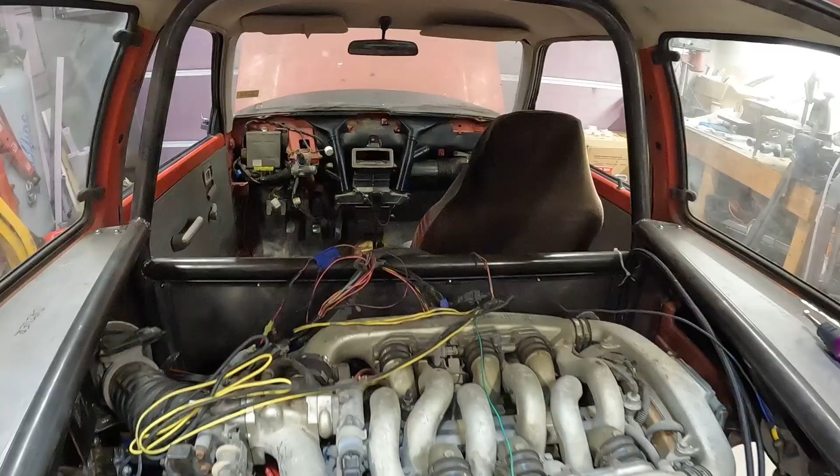Before we get into that, a few of you might have noticed the dash from the Festiva is currently not in the vehicle. Here's how everything looks right now. I've been doing a bunch for the past couple months. You may notice the shifter's sitting in there, the dash is out, there's some extra panels, and there's a new 3D printer over there. I've been making parts for this thing, so before we get into why I need to pull the transmission out, let's do a quick overview of what I've been working on.

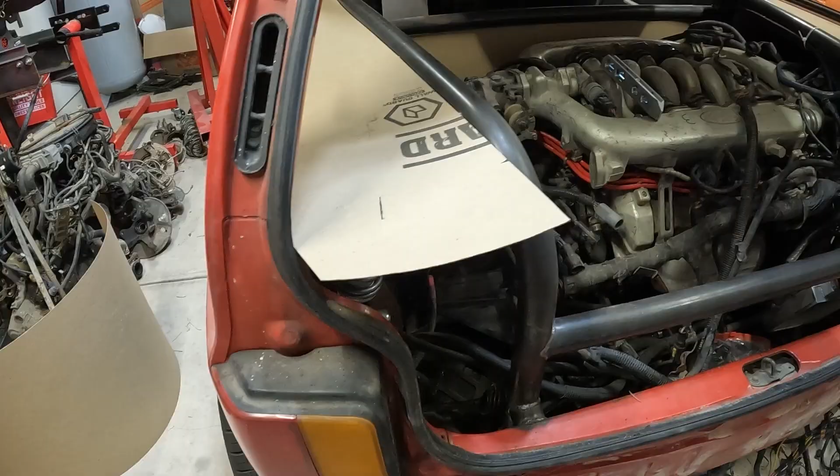I went over to Home Depot and got myself a big old roll of RAM board, which is really nice for making templates that you then use to cut out sheet metal panels. So after I made a bunch of templates, I got a bunch of sheet metal and started cutting it up and making panels for the inside of the car.

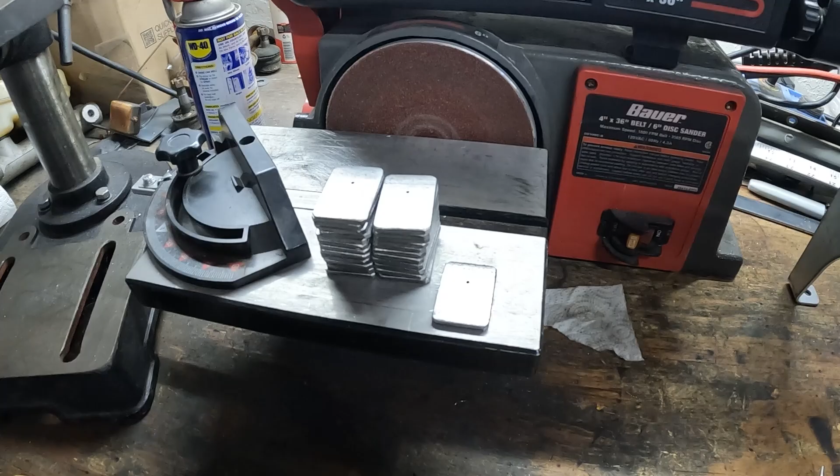Now I needed a way to attach all of those panels, so I started making a bunch of little tabs. These tabs are going to have a hole drilled in them, and then I'm going to order a riv nut gun with some riv nuts and install a bunch of those in those little brackets. That way I have brackets I can weld wherever I need to on the frame, and I can just screw in the panels, so they'll be removable in the future and not permanently welded to the car. I like that so I have access to things and don't weld myself into a corner.

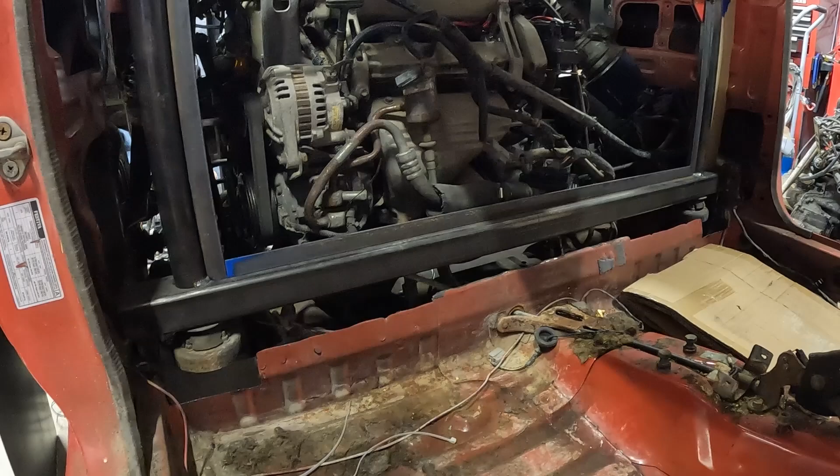With a bunch of those made, I started looking at how and where I wanted to attach things. For that big removable panel in the back, I used a bunch of angle iron made into a sort of picture frame. That seemed to work best and is going to let me make this more or less airtight once I have my panels, some insulation, and some thermal barrier put on.

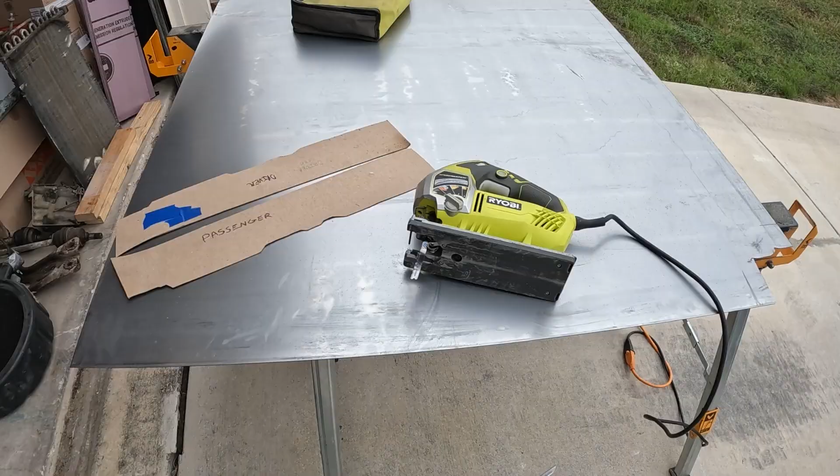All of that was going pretty well, and then I started working on the left and right side holes on either side of the roll cage. Cutting those panels out was a pain, but I think I got them pretty good. Then I worked on the left and right side above the wheels, again using some angle iron for the front, but along the sides is probably where I'll start using those tabs. This is a really nice method because you put everything on there, put your sheet metal on there, and mark it.

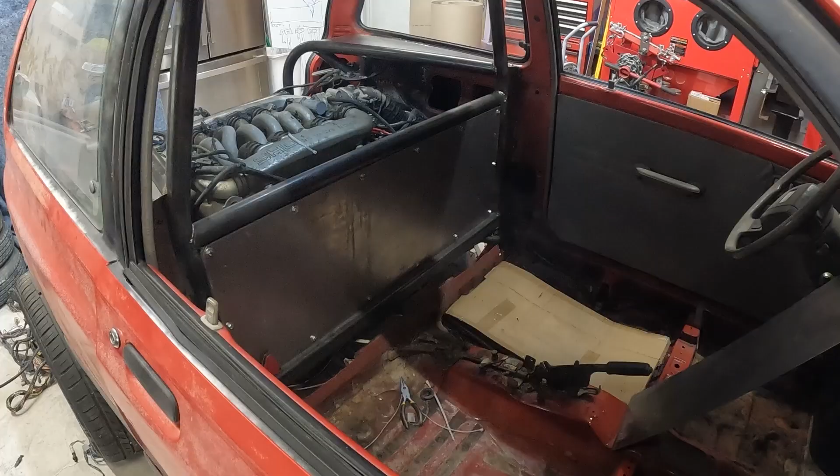Christmas came and went, and it was kind of cold, but thankfully I was able to work in the garage. I started working on that big hole at the bottom of the roll cage and made a panel for that, and got it all welded in real nice and solid.

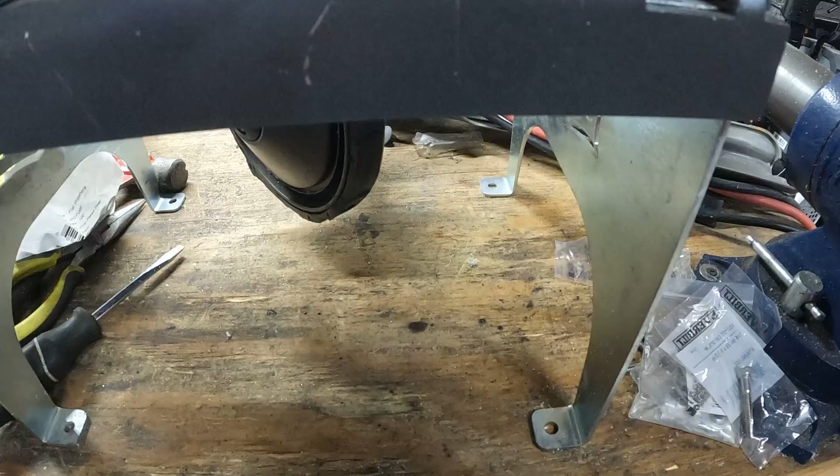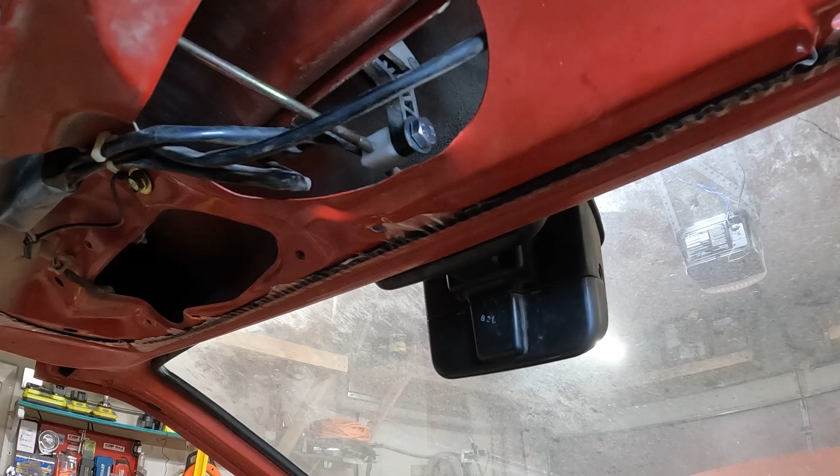I was getting frustrated that the strut in the rear wasn't staying up, so I ordered a new strut and installed it. Then I remembered that the mechanism that releases the latch for the rear hatch wasn't working, so I wanted to address that. Before, there was a small plastic clip, but it broke when I was taking everything apart. So I took some leftover Delrin and a bunch of tap and die sets from Harbor Freight and made this little block and threaded it, and now I have a way to open the rear hatch, and it stays open because of the new strut.

So the next big step was to work on shifters and shifter cables.

I used some wire and estimated the length of the shifter cables I needed, then started working on a way to attach those shifter cables to the shifter. Here's a pretty cool look at how that shifter works.

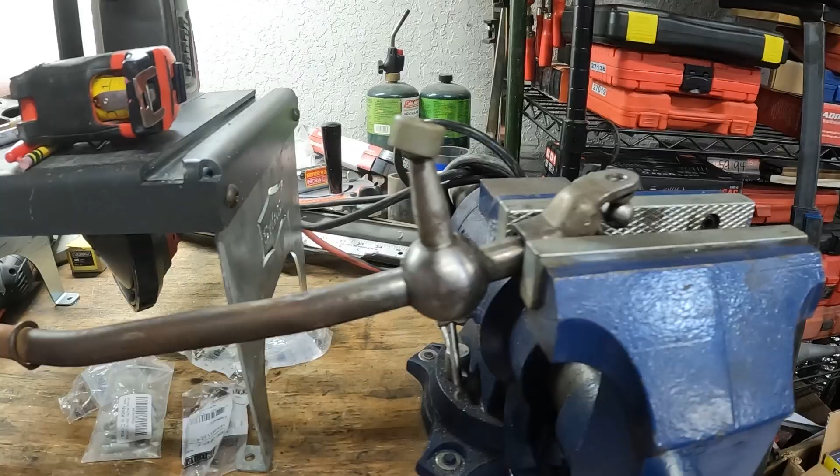When you move it left and right, it moves one cable, and when you move it forward and backwards, it moves another. So I drilled out the old ball studs that were in there and cleaned up the shifter, then worked on controlling everything with my own ball stud attachments that go on the threaded ends of the cables.

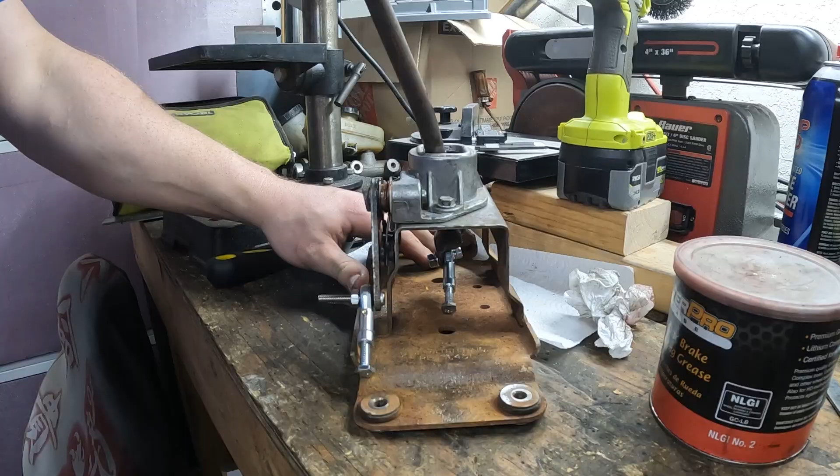Here's all of that. All the parts were removed, and here's everything greased up and ready to go back in the car, a pretty good example of how I decided to do everything for the shifter cables. It's a little tight in there, but everything's moving freely.

So there's the cables inside of the car. One of the cables came out perfect. The other one's about an inch or two too long, and the bend radius is a little tight for the cable, so I might reorder that one, but it seems like it's gonna work just fine for now.

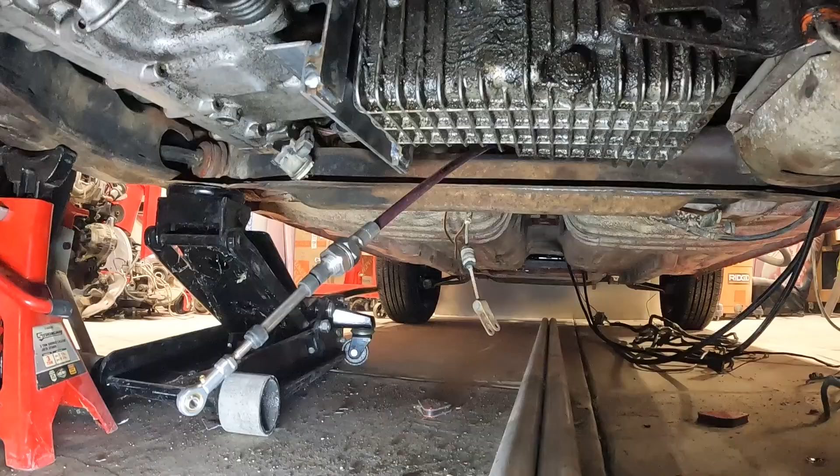I made a bracket to hold one of the cables that's gonna control one of the movements, forward and backward. Figured out exactly where I wanted to put the shifter, and again installed everything with rivnuts so that everything is removable and not permanent.

Then I had to modify this plate because the cable ends were too long and I needed to shift everything away from those ball joints. So here's the modification of that plate that I made.

Then I was able to put everything back in the car, and all of the cables you can see are now being held in place where they need to be held. So that's looking really good.

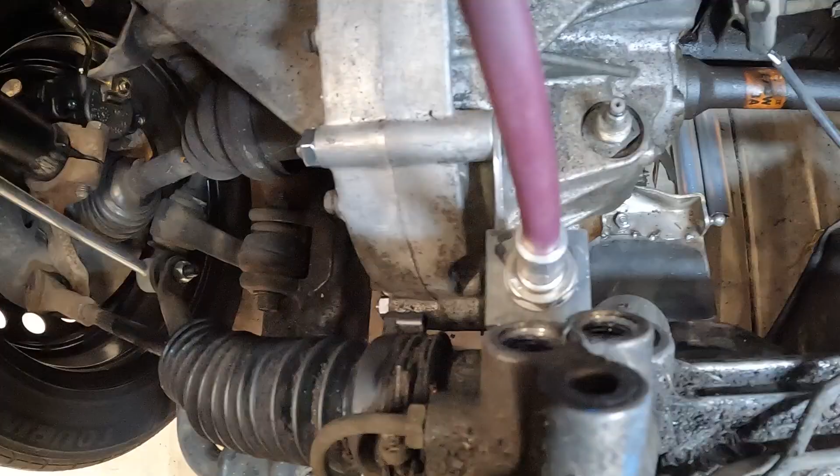Then I got to work on the cable that pulls everything up and down and rotates the bracket that I also had to modify. Essentially, you've got something that rotates it and something that pushes and pulls it.

So here is everything going from first to second to third to fourth to fifth, and then back into reverse. You can see how that linkage all works with the cables. It's pretty complicated, took me a while.

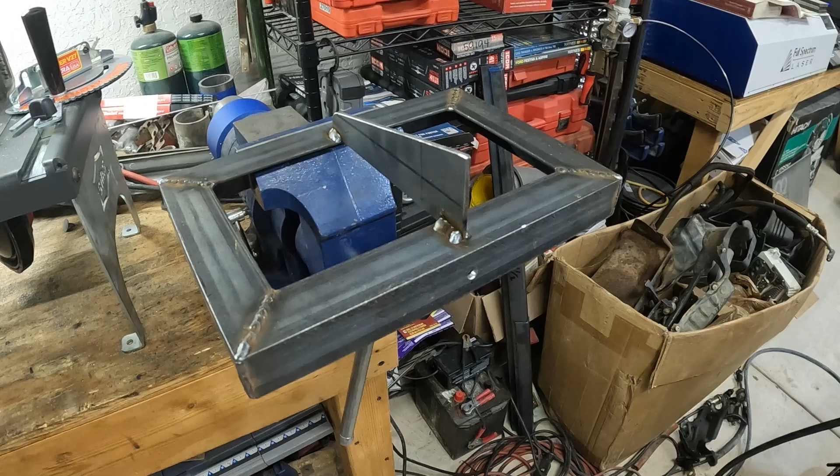Then I wanted to get the battery put in, so I made a nice little battery tray here. Here it is, turned upside down and then the right way up.

I wanted to put that somewhere in the vehicle that would have easy access. Again, my panels are removable, so changing the battery on this thing's probably gonna be a pain, having to take all the panels off to get to it, but it fits in there pretty nicely. It's out of the way, and it's in a really good spot.

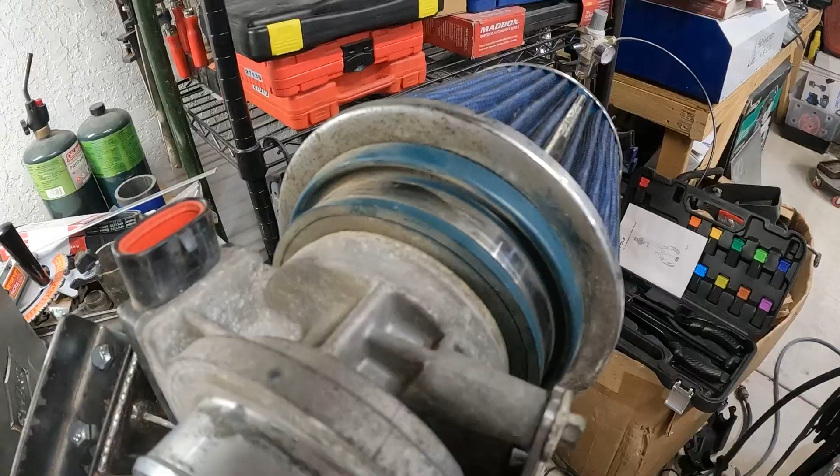After that, I needed to move on to holding the air intake hose and the starter relay, so I made a bracket for that. There's my nice little air intake with the MAF sensor.

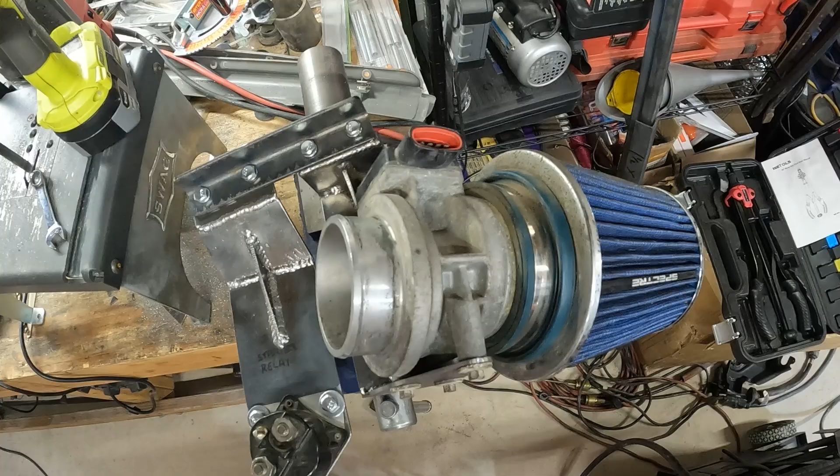So everything's hooked up, and I actually got all of the wiring done to the front of the vehicle, and I can start the car with the key now.

Then it was on to getting the clutch system figured out and the throttle cable figured out. So I started by modifying the clutch pedal. Here's the modification for that.

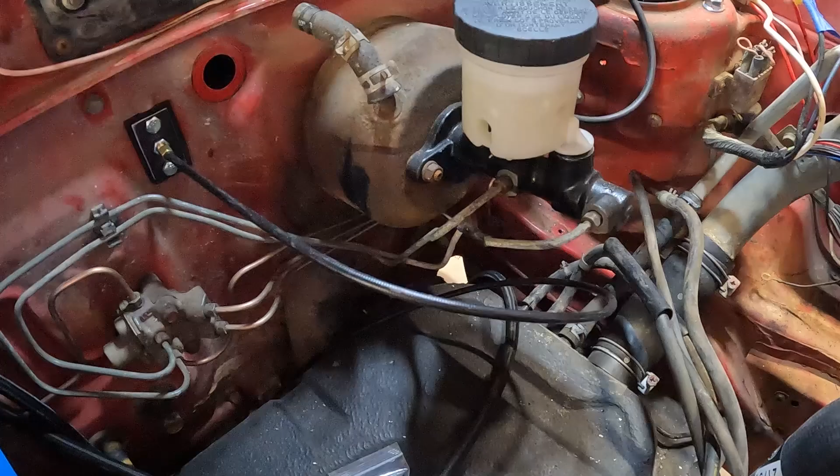Then I put the master cylinder in the car right next to the brake booster, and here is a shot of all of that working out. Clutch goes down really, really nice, and it feels pretty good. Then I installed the throttle cable and all of that's working as well.

So then I took the dash out, which was kind of a mistake, but I really needed to do it because we need to get the AC installed. And I noticed that a bunch of the ducting inside of the dash was starting to fall apart or had been chewed through by mice.

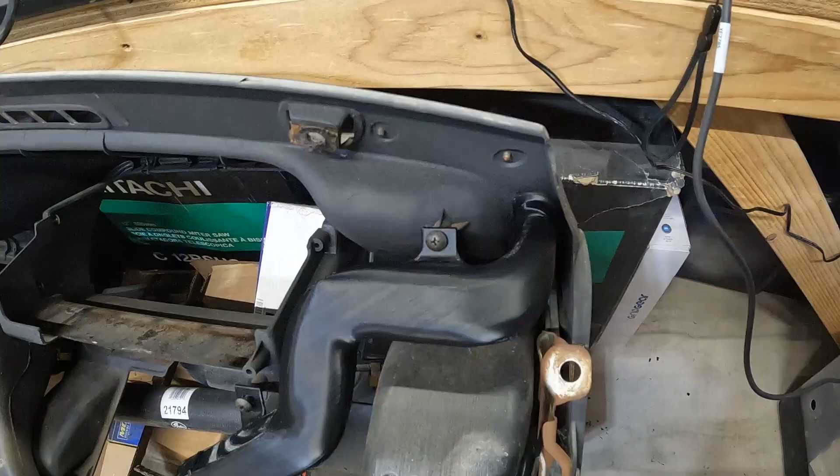So I started the effort of doing a lot of 3D scanning and 3D CADing, and then I bought a new 3D printer and started printing out all of the things I had modeled to replace all of those broken ducts, because I want the AC and the defrost and everything like that working in the car.

So there's a bunch of the parts that I've printed out. You can see there's one on the seat there, and then there's a main duct, and then the new defrost vent that's been printed out. The other side is just a mirror, so I printed out a mirrored set of that.

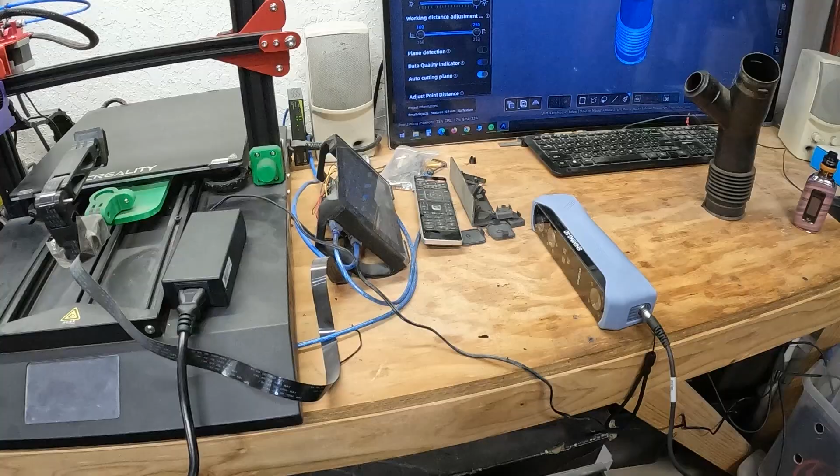Here's what it looks like when I scan something and then send it over to the 3D printer. So here's all of the 3D parts that I printed on the Creality K2 Plus. It's a huge, big old printer. So here's some time lapses from that.

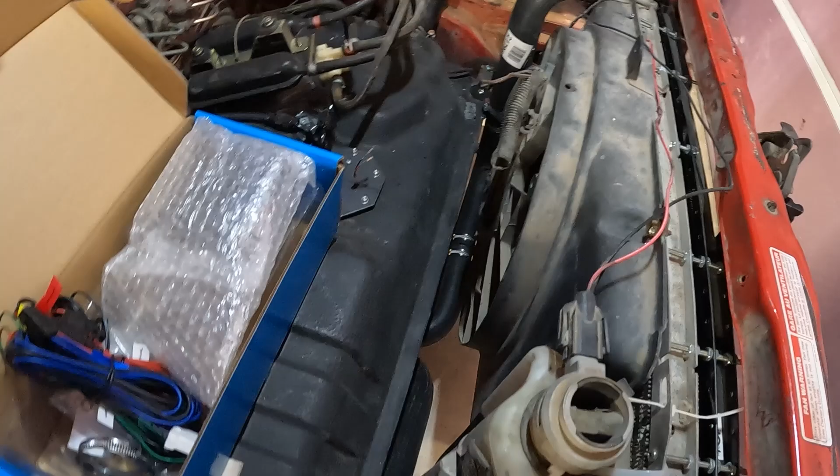Then I moved on to getting the cooling system all plumbed up. I got a bunch of 90-degree bends, and I got my little Davies Craig water pump installed, cut up those aluminum pipes that I had purchased before, ran them all the way to the back, got them plumbed up to the water pump on the passenger side of the motor there, and got a thermo sensor of some sort that came with the pump installed.

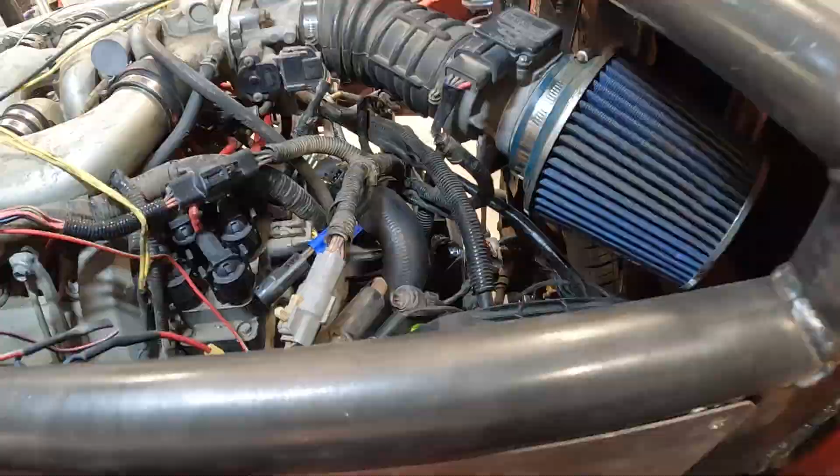So I'm gonna have to run some wires to the front for that. Came down the other side and ran everything right back up to the front of the radiator.

So why does the transmission need to come out of the Shogun? Well, to put it simply, there is no throw-out bearing inside of the transmission. If y'all recall way back when I was first putting this thing together, I had a bad transmission and a good transmission, and I kind of cobbled the thing together as quickly as I could to get it back on 4 wheels so that I could tow it back to my place and work on it here in the garage.

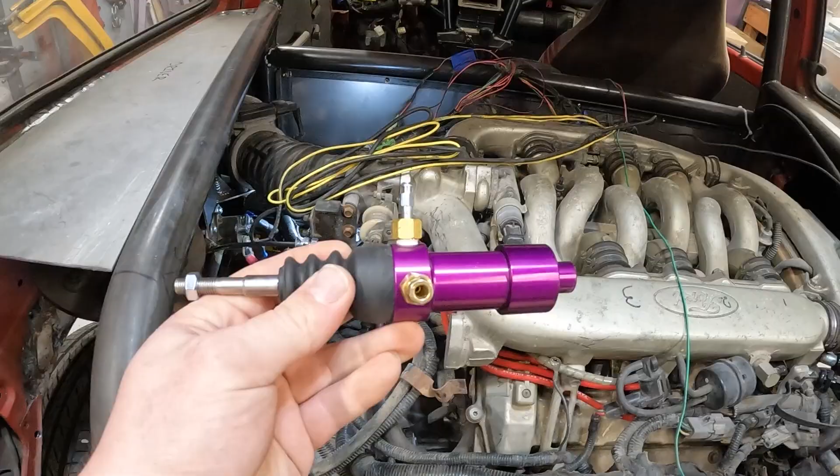This is the pull type slave cylinder that will be installed on the transmission. I will run a hard brake line from the master cylinder up at the front of the car, underneath the car, all the way back to this thing. And this will sit somewhere around here. It'll go through that hole, and there will be a linkage that connects to the clutch lever right here.

And I need to know exactly where this needs to be installed and how long that linkage needs to be, but without there being a throw-out bearing in there to press up against the clutch forks, I have no idea how to make any of that. So I gotta pull the transmission out, install the thrust bearing, put it back together, and then I'll know exactly where the little clutch lever is gonna be sitting at so that I can install the slave cylinder in the right location and get all of that working.

And the cool thing is, once all that is done, I can throw the AC components up in there, put the dash back on, hook everything back up, and I should be able to pull the truck out of the driveway, open the garage door, let the Shogun down, and then pull this thing out into the street, fire it up, and see if it'll move under its own power, and maybe take it around the block real quick and then pull it back into the garage.

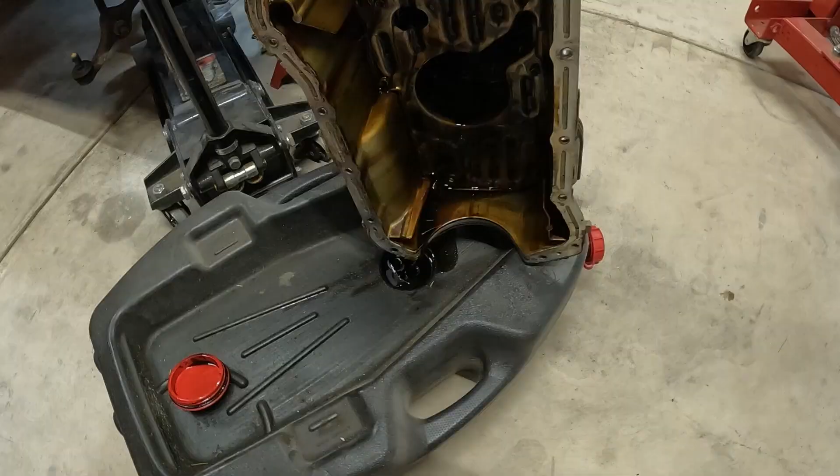All right, well, another week has passed and I've got a bunch of parts sitting here now from Rock Auto, and let's just kind of go over what I decided to order. So sitting over here, we have a brand new clutch, oil pan gaskets, and gasket maker.

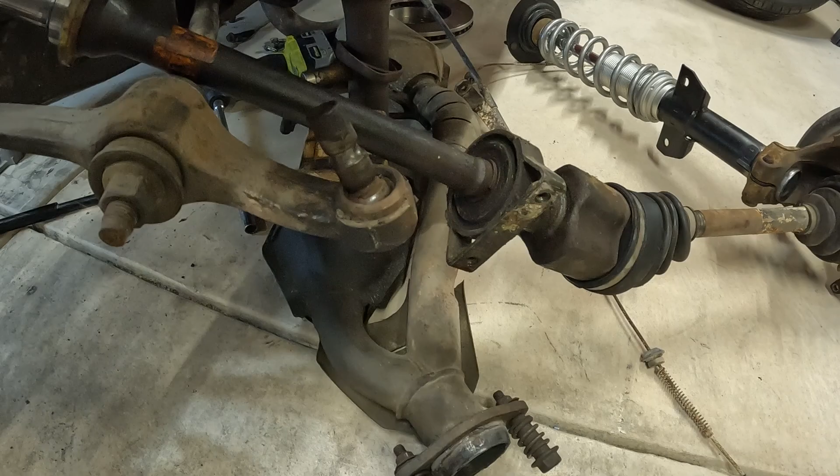I went ahead and got some new lower control arms because the ball joints on these old ones are kind of worn out and the boots are gone. And then I started looking at CV axles and decided, well, now that we've got this apart, now's a good time to do CV axles.

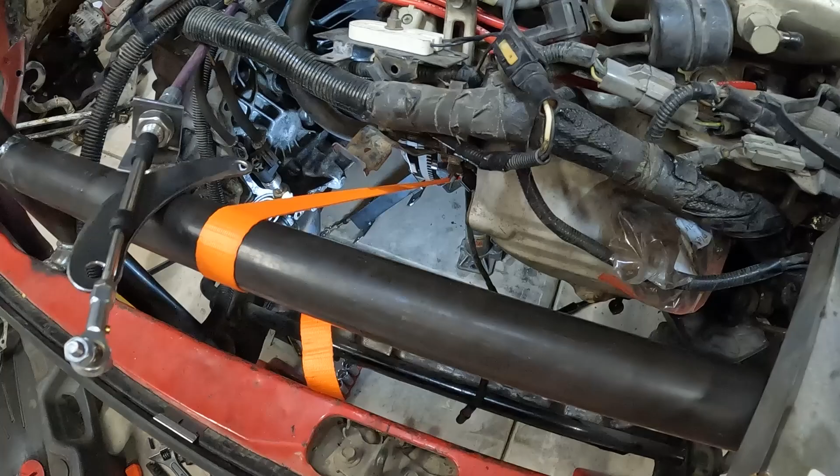Those should actually be here tomorrow, as well as the rest of the tie rod ends. Speaking of the tie rod ends, I went ahead and removed the steering rack, so now I need to develop a way to hold those tie rods in place without the steering rack being in there. I'll have to jump into that.

I got the oil pan taken out, and they say when you do the clutch, go ahead and do the rear main seal, and then there's a plate on the back there that needs to come off that makes the whole thing a lot easier. So there's another gasket in the kit to do that plate gasket.

We'll get into that. Let's see, included with the clutch is the new throwout bearing. I got the old one off — well, half of it, the other half wasn't really even in there — but we're gonna have to throw that in, so that's all good to go.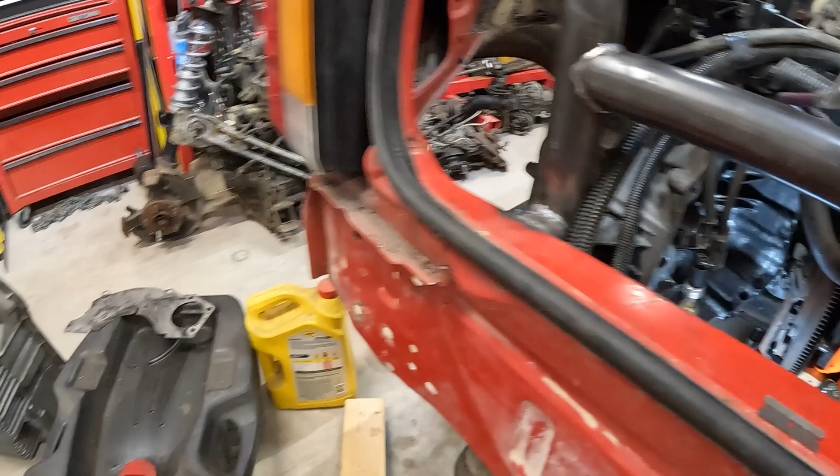And then I spent a good day with the pressure washer, some paper towels, and some razor blades, and got the oil pan all nice and clean. While the car has been sitting here, it's been slowly leaking something, and I don't know whether it's oil, transmission fluid, power steering fluid, something, but it's really hard to tell where it's coming from with everything being so dirty.

If you remember when we took this engine apart, the case on the bad transmission had basically exploded, so it might just be that there was a bunch of transmission fluid covering everything, and over time gravity was letting it flow down and slowly drip off. So just to make sure we don't have a valve cover gasket leak or something like that, I got everything nice and clean so that if something does leak in the future, we can trace the drip all the way back up and see exactly where it's coming from.

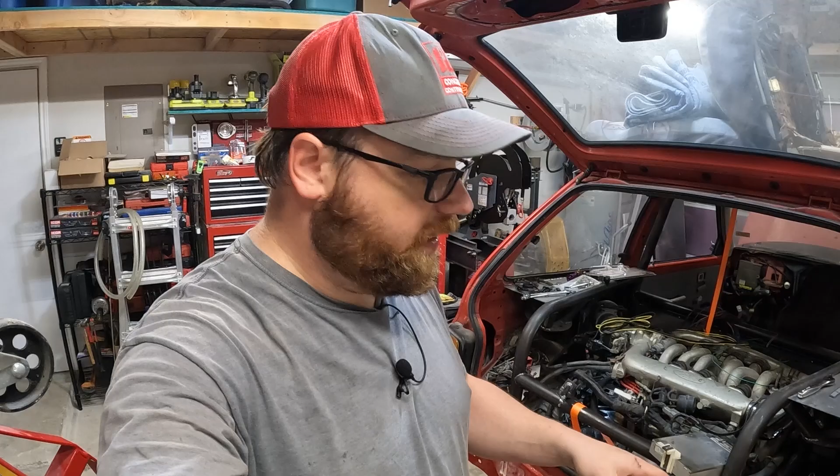So let's go ahead and get the clutch out of here, get that plate off, and start replacing it with the new stuff. Then we can get the oil pan and the gaskets all put back in and get the bottom of the motor put back together. And then we can throw the transmission back on with the new throwout bearing and get everything remounted in here. Tomorrow, as soon as the new CV axles and the rest of the tie rod stuff get here, we'll throw the rest of the wheel assemblies, the suspension components, all of that back in. But first we've got to get the bottom of the motor put back together. So here we go.

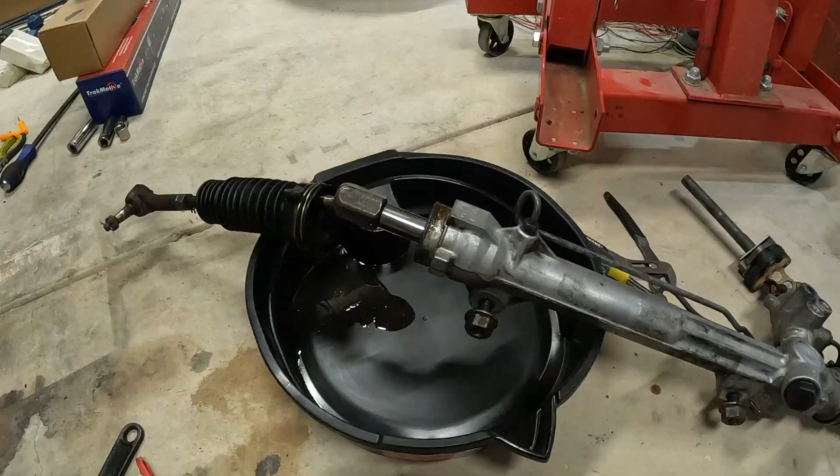The transmission is connected back to the engine and it's all put back together in the car. As you just saw, I started working on taking the steering rack apart. The reason for that is because the threads on the end of the tie rods are a 15/16 by 20 thread per inch thread, and I'll be danged if I can find a bolt or threaded rod to match up with that. So here's the plan.

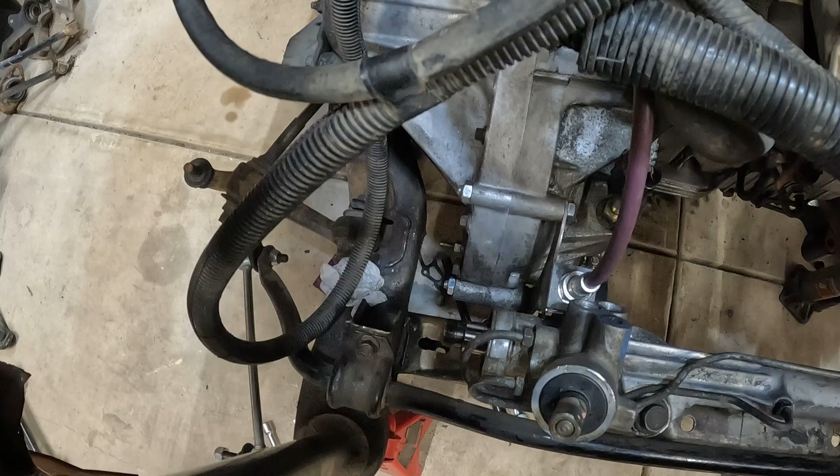I have the steering rack back in the car now with the tie rods off. You can see here on this side the threads are sticking out. I've done this because I need to know exactly where to build some mounts for those tie rods to attach to. The plan is I'm going to put it all kind of back together, attach the tie rods, do some measurements, maybe take some 3D scans, and then I'll know exactly where the rod that's inside that steering shaft or steering rack needs to be located.

Once I have that, I can build some plates and we can take that shaft out of the steering rack, and we'll use those threaded ends to connect the tie rods. That whole shaft will be welded in place exactly where it would be as if the steering rack was still in the car. Then we'll just cut the center of the shaft out, which will leave us the two ends that are threaded to attach our tie rods to, and then we can remove the rest of the steering rack.

So right now I'm going to try to put all of this stuff back together with the new parts. I may or may not throw the new CV axles in. I didn't order the bearing seals that go on the knuckles, so I'm a little afraid if I go pushing out those CV axles, I may be in a position where I need to get bearings and bearing seals for the knuckles, which is more time waiting.

But right now, if I leave it as is, I can put it all back together and get the tie rods positioned where they need to be, get everything put back together, and drop it back down on the ground and move forward from there. If I need to do CV axles in the future, we have them, and they're not too difficult to do, but at least the car will be back together. I could do those CV axles at a later point and then order the seals if I need to.

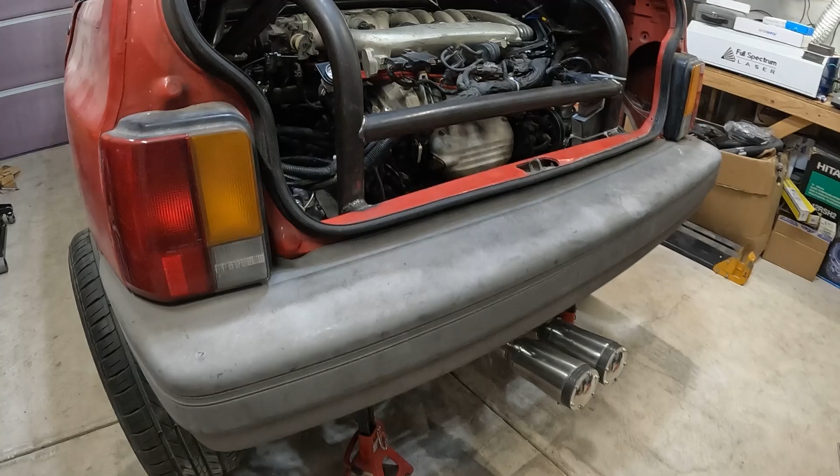Well, apparently there was a lot more that I needed to do in order to get this thing ready to test drive than I had originally thought. But I think we're right at about that point where we can open up the garage door, get this thing off the jack stands, and take it around the block real quick. I'm not too sure about the brakes — they do go to the floor, but there is resistance right towards the end. I'm not sure if the master cylinder is big enough to supply all of the disc brake calipers from the Taurus with all of the fluid they need.

So I think what might be going on is that I need to get a bigger master cylinder with a bigger bore so that I can push more fluid to the brakes.

I tried bleeding them like 3 or 4 times. I even had a vacuum bleeder somewhere over there. That didn't seem to help too much, because as you undo those little vacuum bleed screws, air can get sucked in where the threads are, and you think you have bubbles, but you don't - but maybe you do, you never know. I probably need to get it over to a friend's dealership place and see if they can pressure bleed it, but I'm pretty sure I'm gonna end up needing a bigger master cylinder.

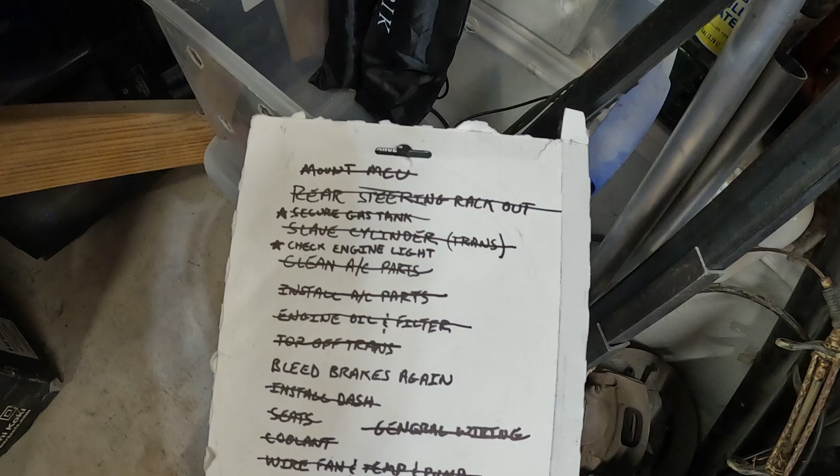Steering rack, secured the gas tank, we got the slave cylinder and the master working. The slave cylinder is a little bit janky - as you saw in the video, it flexes the plate that I made - and I probably just need to undo that plate and mount it directly to the transmission through that hole.

I don't know, I'm gonna have to take a look at that later, but for now I know that it works - it's separating the engine from the transmission.

I had fired it up to test it, to make sure I didn't have any water leaks in the coolant system anymore after I put everything back together, and everything seemed fine. So I pushed on the clutch, put it into gear, the wheel spun, pushed on the clutch, pushed on the brakes, the wheels stopped, so I'm fairly certain everything's just gonna work out here.

I did put an oil gauge on the back, where the motor is, right there, because I do not have enough copper line to go all the way to the front of the car, which I want to do eventually. I might leave that one there, run a T, and then run a separate gauge up to the front so that I have gauges in 2 places. Seems kind of dumb, but it'll be nice to know I have oil pressure if I'm back there messing with the motor.

I did a bunch of 3D printing. That was pretty cool.

We got some clamps underneath the car so that all of the hoses and lines are held up, all the gas lines, the brake lines, so on and so forth. The throttle cable is like from a go-kart, maybe 10 or 12 feet long, and you'd figure that would work pretty well, but it's really stiff. The gas pedal is almost as hard as the brake pedal, almost feels like a clutch pedal, so I think I need to order an actual throttle cable for that, kind of like I did with the shifter cables for the transmission. We'll get back into that at some point, I'm sure.

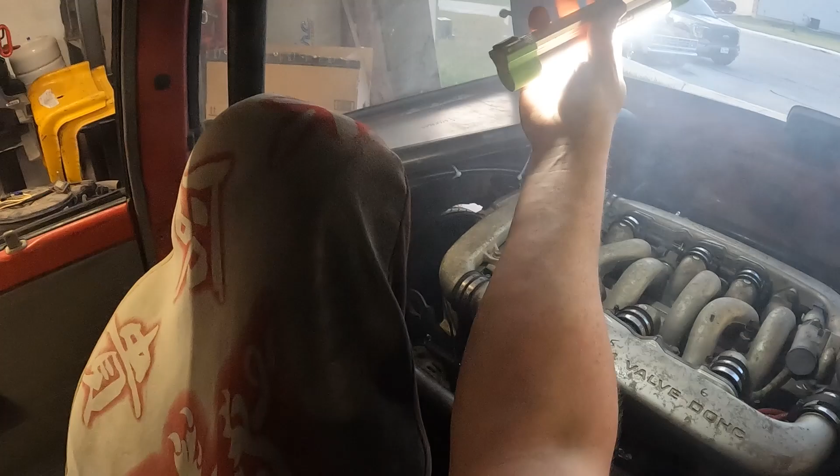Holy crap. Oh yeah, I left the light on. Okay. Very, very smoky, I think we'll stand out here for a minute.

Okay, so first impressions, this thing's gonna be very, very quick once I get it all figured out. Something's definitely going on with the motor. I don't know if it's still relearning, maybe the computer needs to figure stuff out, maybe I've got a vacuum leak. I don't know how my timing could be off, but maybe it is somehow.

Again, I don't know if the oil pressure was there. The vacuum line's good, the brakes worked, and we're definitely rubbing. I want to say on this front tire up here. I could smell it and I could hear it.

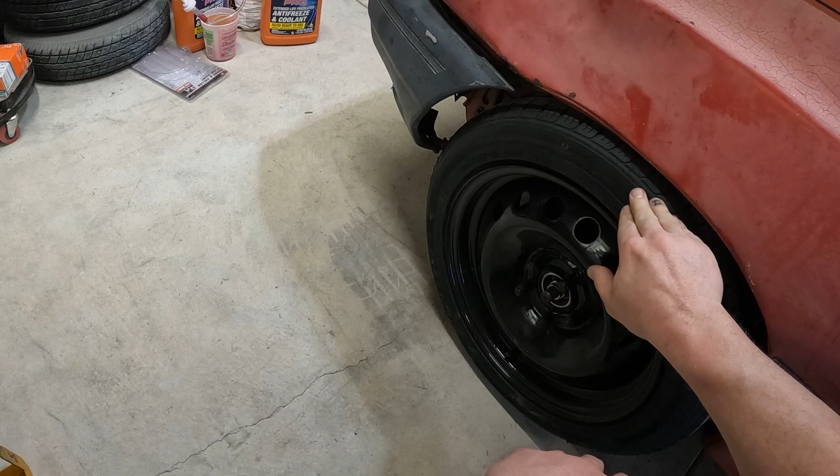Oh yeah, that's definitely rubbing, so I need to jack this back up a bit. I think it was only this one though, because of that dent, but I need to jack it back up again and raise the springs. This one doesn't seem to have any wear marks on it, so I think it's just that front one over here. So we'll have to adjust that.

That gas pedal is really hard to push down. It was a little hard to control the throttle. The brakes, despite being mushy, at least they were all there, so that's good. It's really loud. I need to get an engine cover plate put back up on there and figure the rest of that out. But as far as a first test goes, that was really nice.

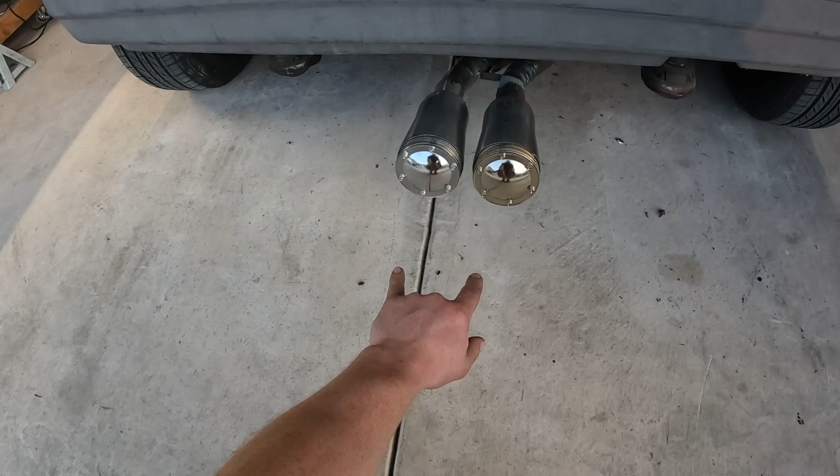I'm seeing discoloration between these two. That's interesting. That one's got a darker color than that one, so I think we might have a dead cylinder or something going on in the back half of the motor. I might pull out the laser thermometer and check that out. I don't know if y'all can see it or not, but this one's definitely a darker color than this one, so I think this one was getting hotter than this one. Not sure why that would be.

Probably need to think about that a little bit. If y'all have any ideas, let me know. Y'all did hear it backfiring and sputtering. And that's interesting that one bank, the front bank, is getting hotter than the rear bank. So maybe something's running too rich, maybe something's running too lean. I probably need to check my fuel pressure regulator and make sure my fuel pressure is good. And maybe get the check engine light and do some self-diagnostics on this thing.

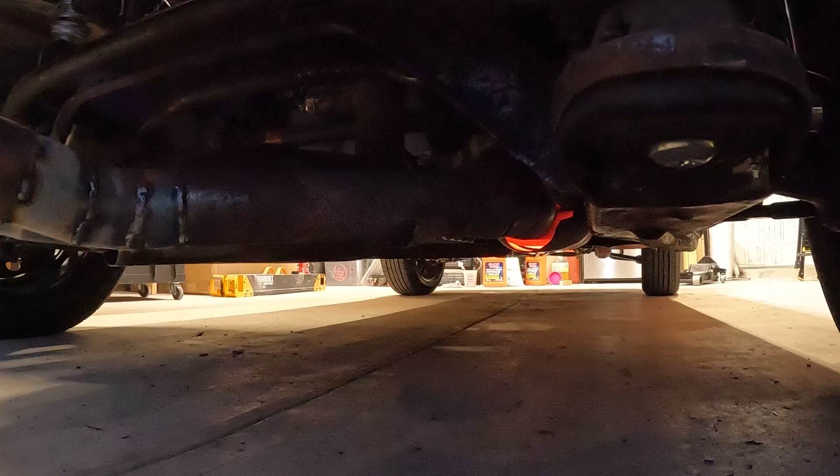Well, I had number 5 and number 6 backwards on the coil pack. Just had to swap those two. Now everything's fine, runs perfectly. Lesson learned. So yeah, hey, you know what?

We made it around the neighborhood. It felt very strange, didn't feel very secure, was not comfortable driving it at all. So there's a lot to address, but the point is, it runs and it drives and it can move under its own power and it stops. And I think this is a great place to end this episode. We did it. It's running.

Y'all heard everything that I heard, you saw everything that I saw. I'm probably gonna jack up the front end a little bit and adjust those springs and maybe take it around the block again. I don't know, we'll see. Hopefully the computer does some learning or something, maybe it's just trying to figure itself out. Maybe we got a bad injector, bad wire, bad plug, something maybe going on. Need to hook up that check engine light.